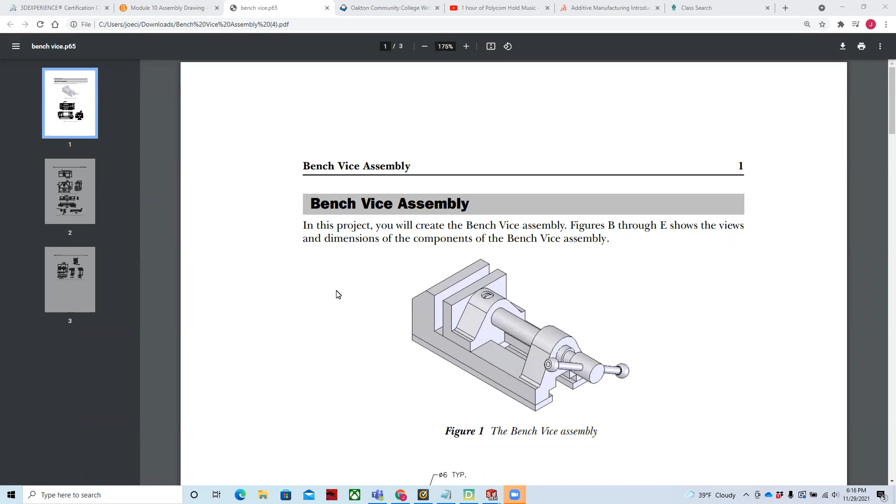As you recall, we're working on this project, and the project is to create an assembly drawing. And let's take a look at the outline. And so we're going to model each of the parts. We're going to create an assembly model of the vise, and then we're going to create an assembly drawing with an exploded view and a bill of material. That's it, 1, 2, 3.

If you would like the files printed, just note it, because it will take a while to print those and use quite a bit of material. And it's yours if you like it. So they make a great desktop companion. So these 3 things: model the parts, create the assembly model, and create the assembly drawing.

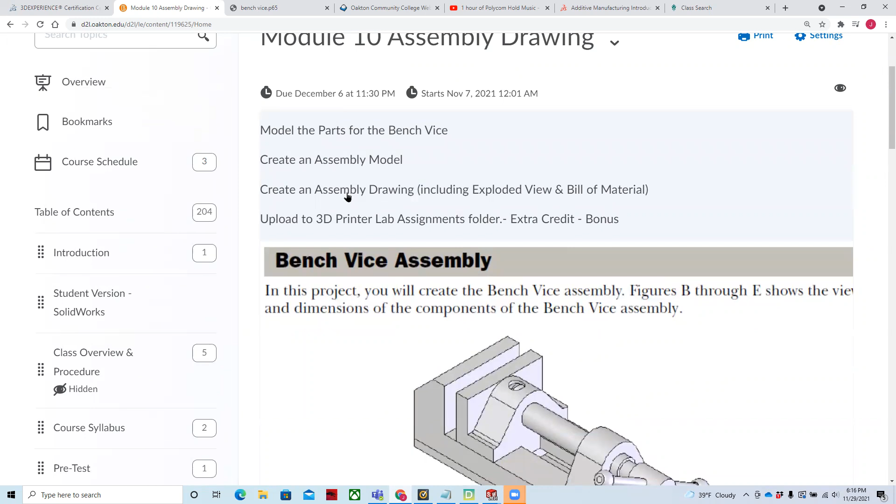So let's take a look at the drawing itself. We've gone over these individual parts and how to model them. And then last week I went through and created a video on how to assemble the parts. And so as we look at Solidworks, let me see if I can bring this onto the screen. This is where we left off our assembly last week. And so we have this assembly that we created from all the different components with our different mates.

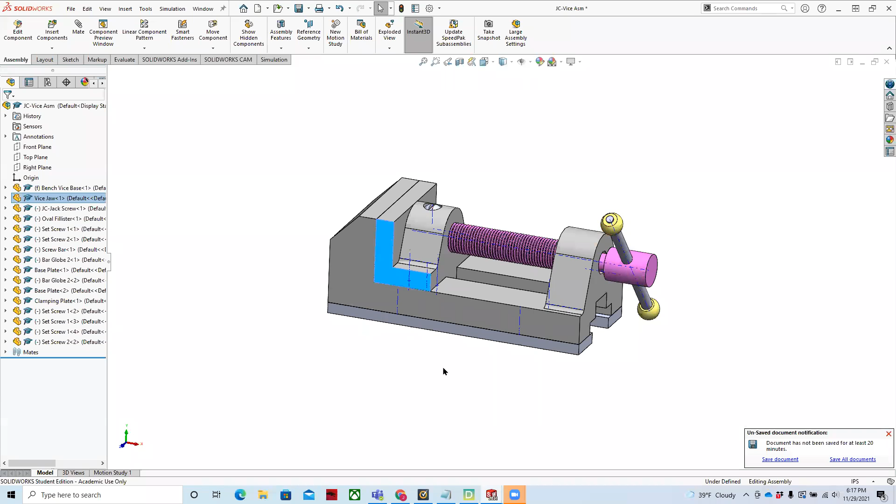And so we can open and close that. And then we have all the mates so that we have our fasteners in, we have our bar globes, we have our fasteners in the bottom, and everything is pretty well set up from a fundamental level. Now, the second part of this would be to create an assembly. And so as we look at this, I'm going to go and grab an assembly view, an isometric view. And that way I have a good frame of reference as to where that part is going to be.

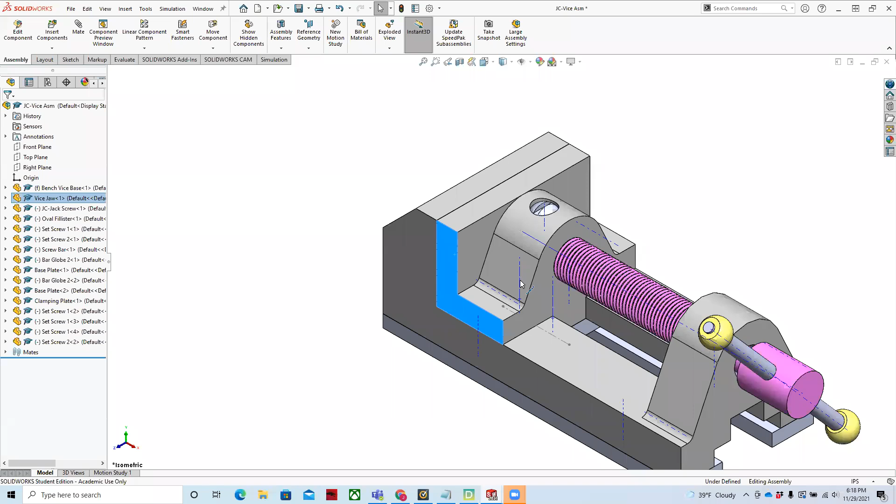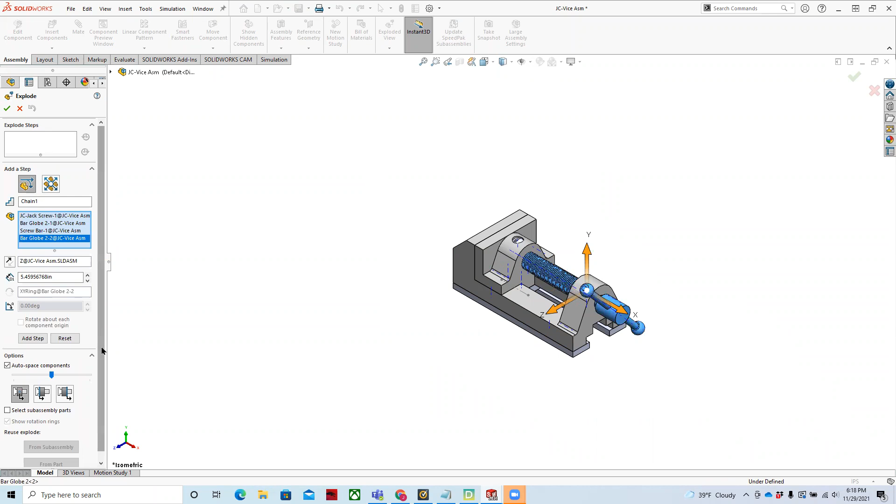And then what I'm going to do is I'm going to go to the exploded view, and I'm going to say exploded view. And what this will do is it will put me into the exploded view detail here. And so I'm going to start off by selecting the components that I want to move. And so I'm going to select the bar globes and this jack screw. And then I'm going to take off the auto space components. I'm not really ready to use that at this point because it'll start to spread everything out. And then all I'm going to do is I'm going to pull on one of these axes and pull these parts out. All right. And so that's the first step.

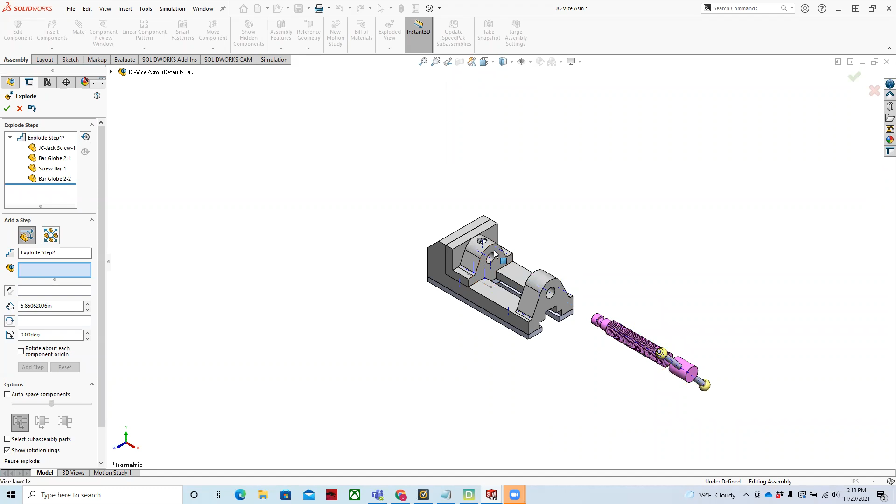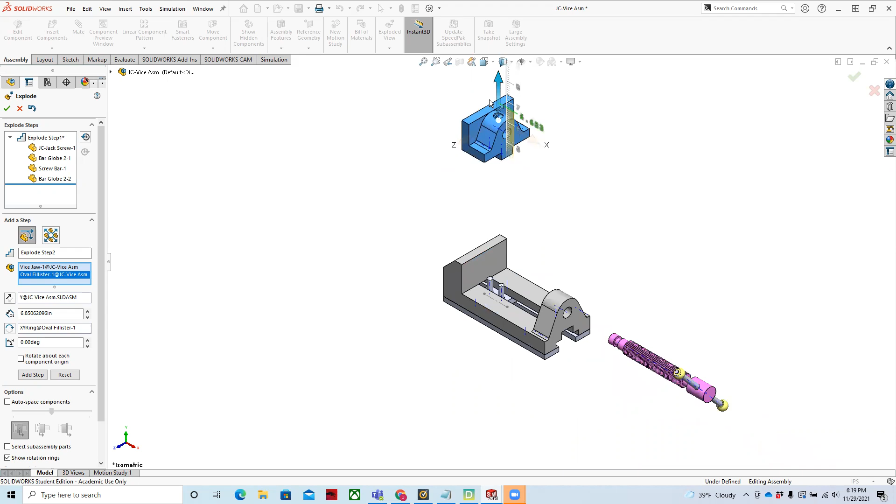And then I can say done. And then I can create a next step. And for my next step, what I can do is I can click on other components. And so I'm going to click on these 2 components. I think I got them both. I'm not sure. There we go. And then I'm going to bring this up. And I'm going to back down a little bit, bring this up a little bit more. Great. And I'm going to say done with that.

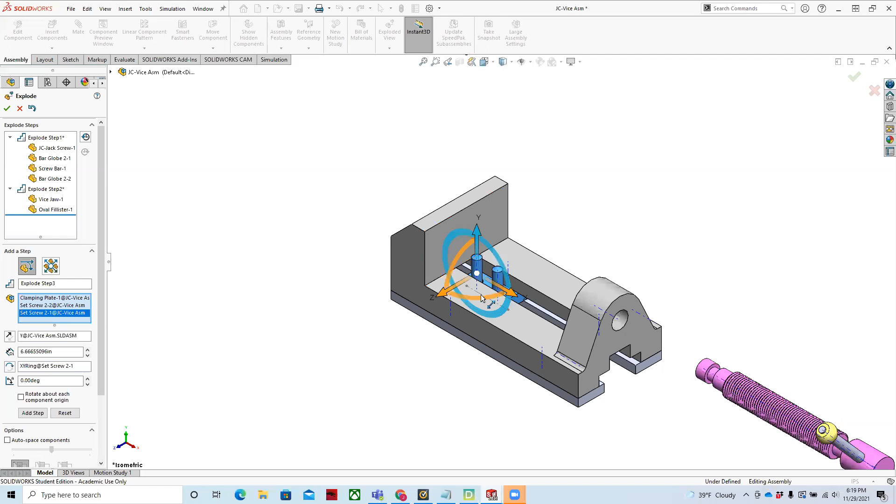And then I'm going to bring the other components. And I was going to bring them down, but I think I will, yeah, let's bring those down. So we'll select these components. We'll bring these down. And then we can separate these other components as we start to work with it. So we can kind of start to follow how it goes together.

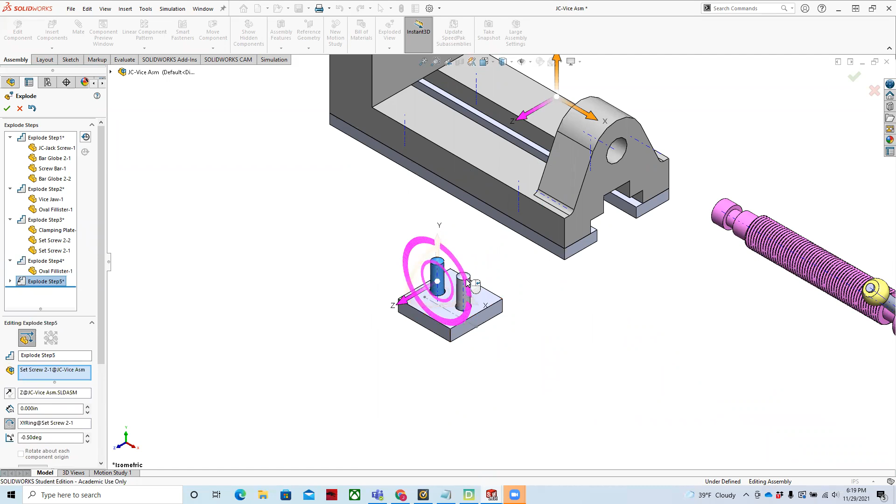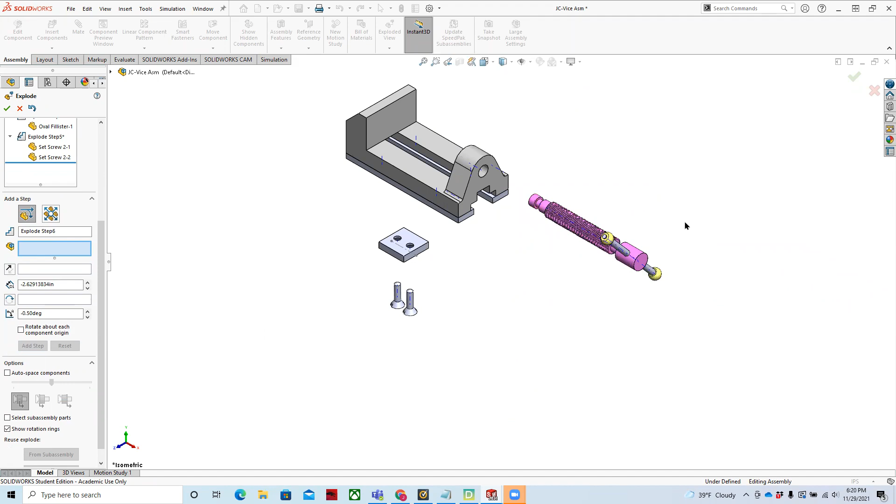I don't know if we need to explode this part here, but we might as well. So let's go with these last components. And let's just move these up. And we'll take these off.

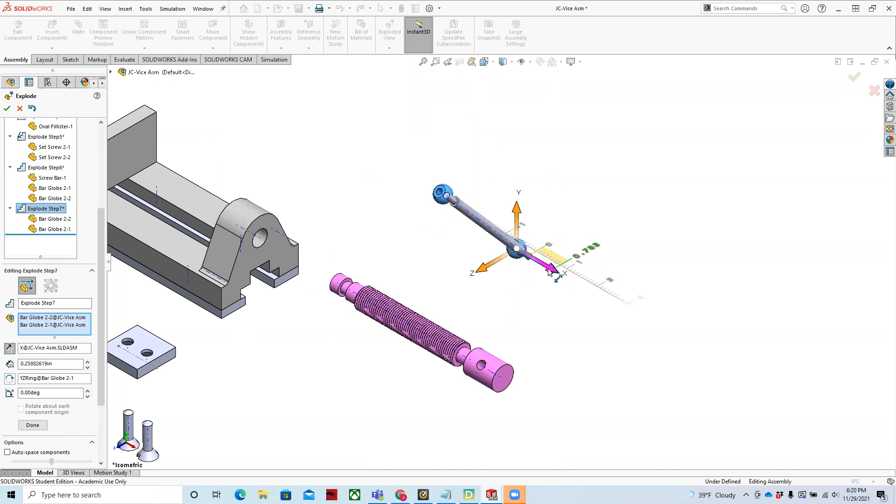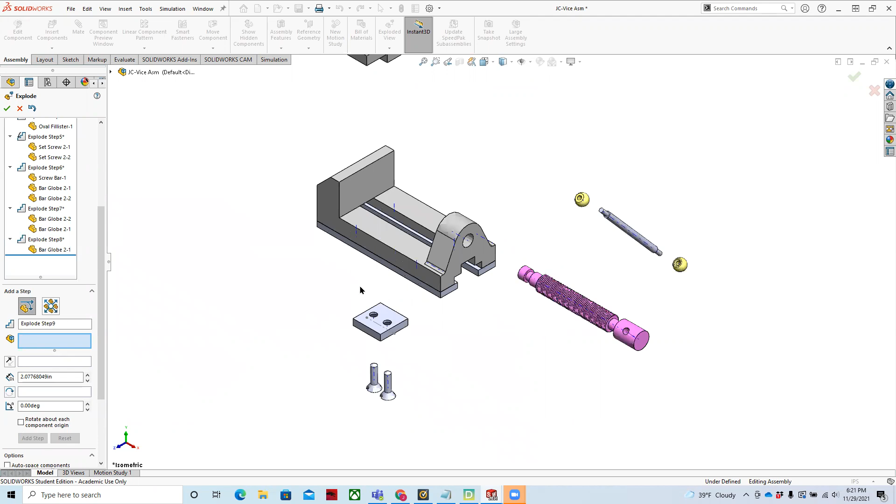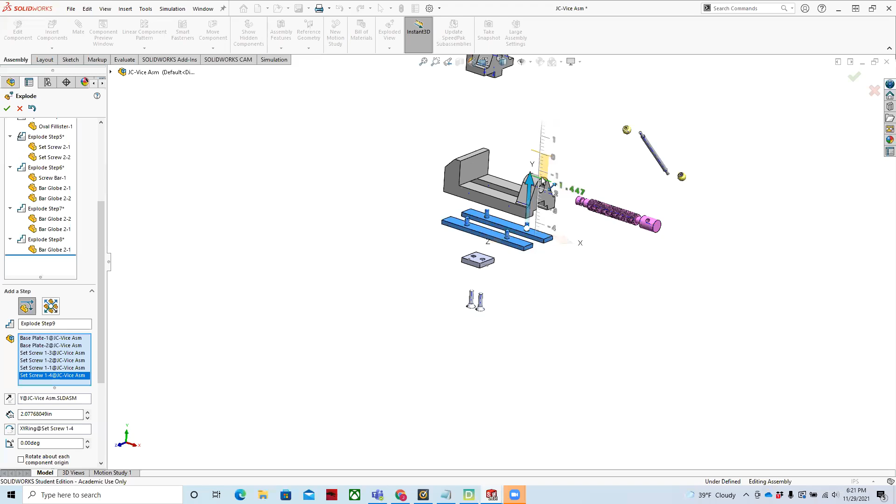That might be a little glitchy on the video, but everything else looks fine. And let's get these last components. Got to remember to get the fasteners with them. And lastly, I guess we'll just have to go about there. Okay.

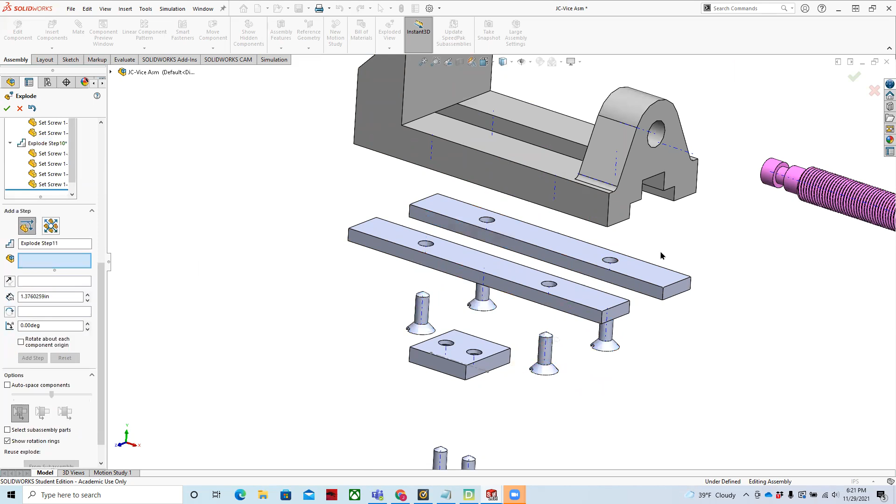So that explodes our components. And then the next thing we'll do is we'll go ahead and accept this. We'll green check mark it. And so this is our exploded assembly. And we can go and we can collapse the items. We can go here to our detail and we can right click on it. And we can, let's see, maybe it's this other one here. So we can go and collapse the items.

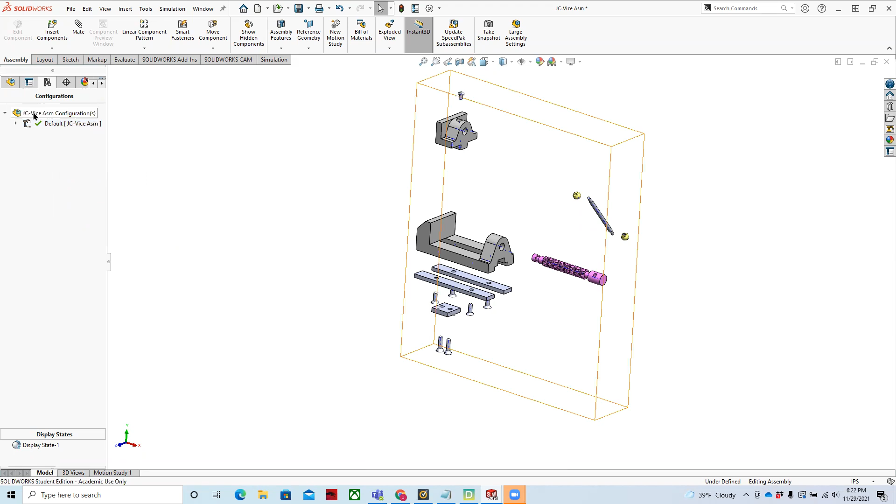Let me pause the video for a second and see what's my glitch. I think I need to collapse the items right here from the main menu. Yeah, that's it. And so we can collapse the items. And then what we want to do, we'll save this file. We'll rebuild the parts. And I'll just keep the name the same.

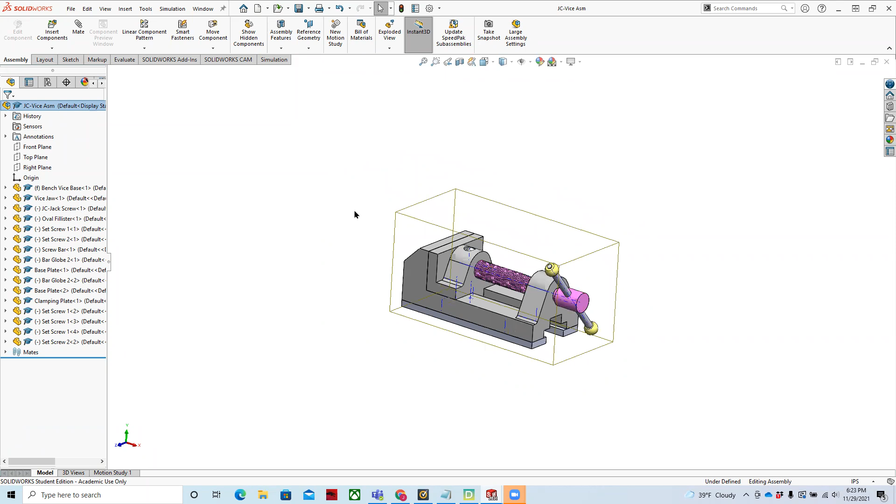And now what we're going to do is we're going to create an exploded assembly drawing. And drawings are really a great part of this program. I wish we had spent more time on the actual detailed drawing component aspect of it. But it's not that difficult either as you start to go through it. And the way we're going to create an exploded assembly is we're going to go make drawing from part or assembly. And so we'll select that. I want you to use a B-size landscape.

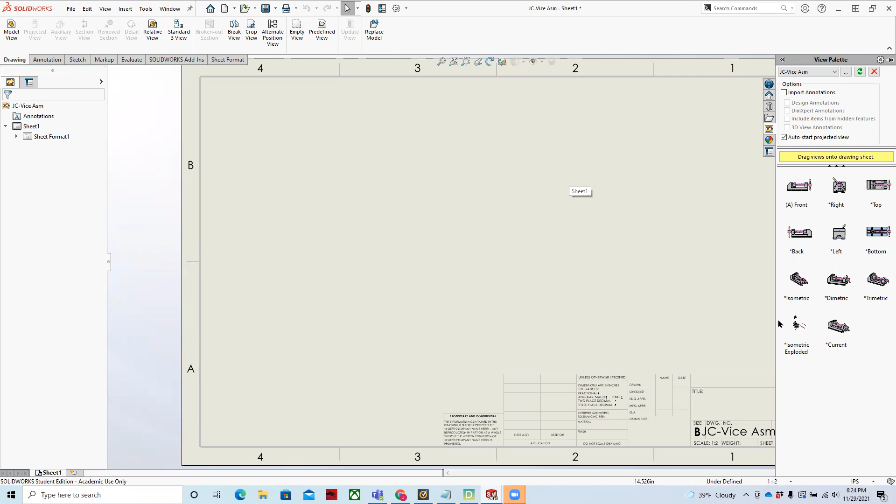And once we have that started, what we're going to do is we're going to bring in our current view. Now, you could bring in front, top, right side views and all that, but I just want to have one view that we bring in. And so we're going to bring in this view right here, like that. And then I'm going to change the scale of it, make it bigger. So let's go with a custom scale and let's see if we can fit it in there on full scale.

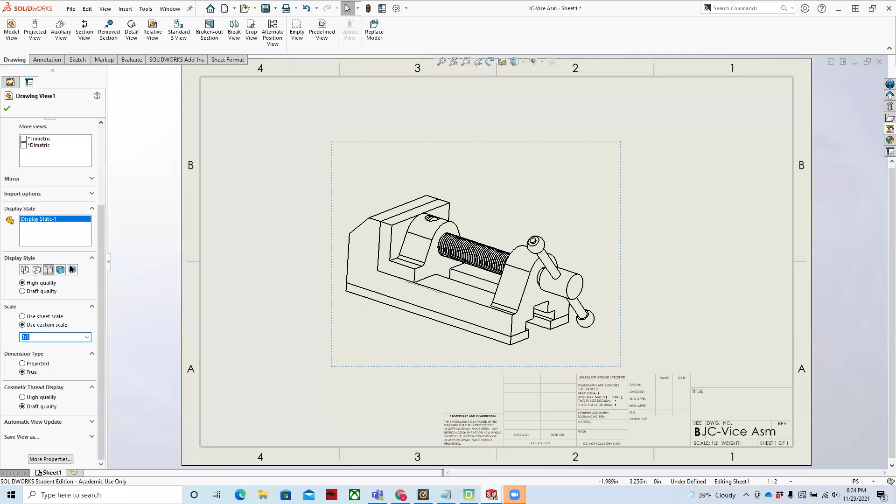And that looks good. And then I'm going to show that in a display state like that. I'm going to green check mark it. And then what I'm going to do is I'm going to show that in exploded view. And so I'm going to go into the properties and I'm going to go and show an exploded view. And I'm going to say, okay.

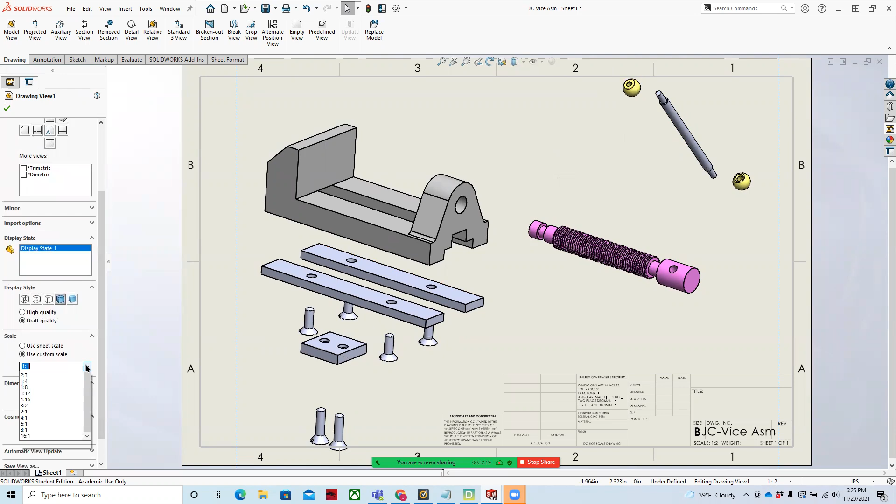And I'm going to have to adjust this window a little bit. Like that. And I'm going to need to adjust the scale. This didn't turn out exactly the way I was hoping it would, but I'm sure I can make that work. And so looks like we'll have to go with a smaller scale. There we are. So here's my exploded view, and this looks fine. And so I'm going to green check mark it.

And then what I'm going to do is I'm going to add the annotations to it. And so what we want to do is we want to go and create a table. And so on the annotation tab, we're going to select tables, and we're going to create a bill of materials table. We'll green check mark this. And what it'll do is it'll go out and find all our details, and then it will number them for us based on how we assembled it.

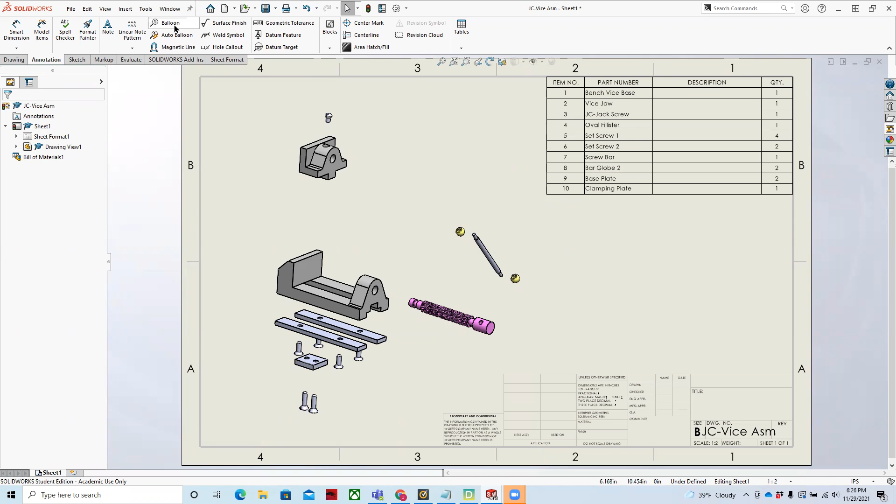And so we're going to put this in the top corner. And then what we're going to do is we're going to add balloons that will then relate to those different items. And so what we'll do is we'll select balloon. And then we can start with our base vice. And then we'll go to the next component. And try to space things out neatly.

What I used to teach with a pencil up at NIU, the idea was to kind of create like a starburst effect where your eye kind of follows the details as they go around it. This is going to be the same. There is a way to have multiple arrows to one number. We can look that up at another point.

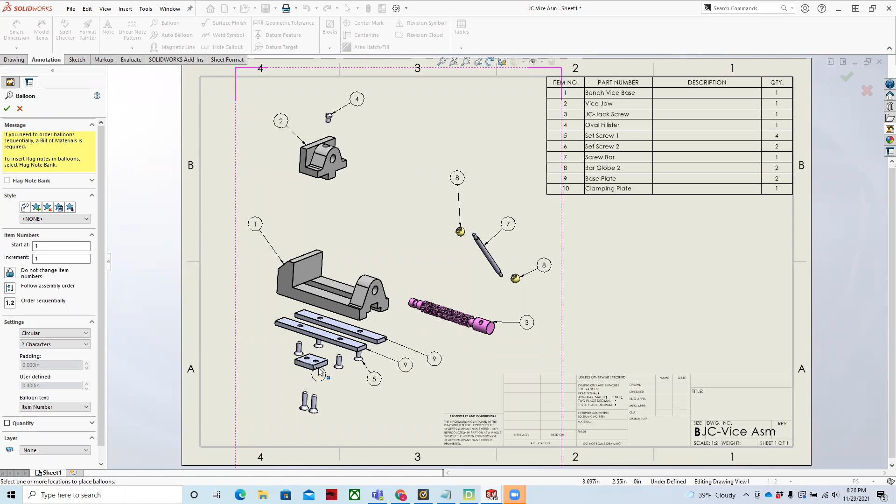All right. And so this illustrates how to create the detailed drawing, the exploded assembly, and the bill of materials. We'll green check mark this. And then we need to be able to put our name onto the drawing.

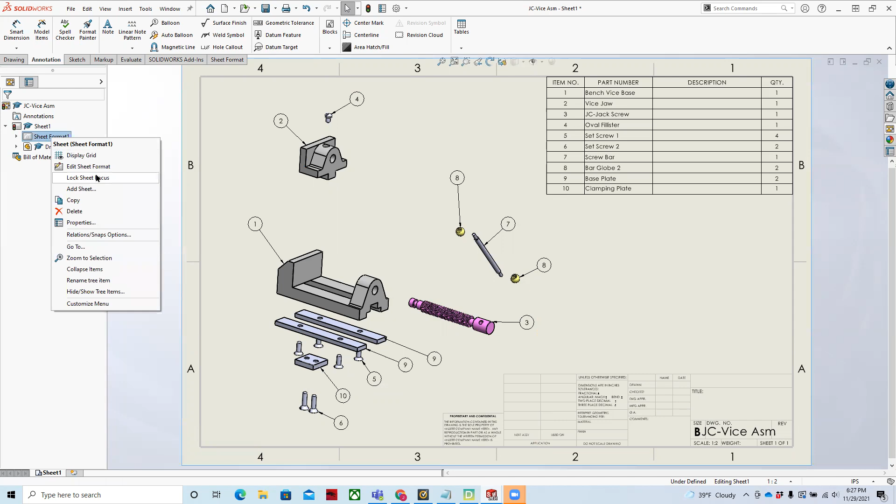And the way that we do that is that they have these called sheet formats. And it's kind of like a layering system, almost like AutoCAD works with, where these parts are linked. So if I do make any changes to any of the fasteners or anything here, they will update in the assembly drawing. But from a standpoint of the title block, the way you would access that would be to right click on sheet format and say edit sheet format. And then what you can do is you can double click in these different areas and you can then add the title block information.

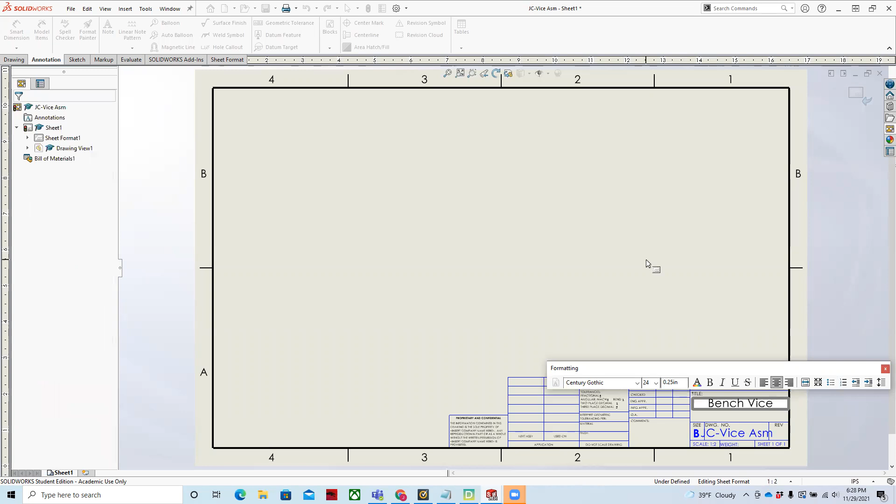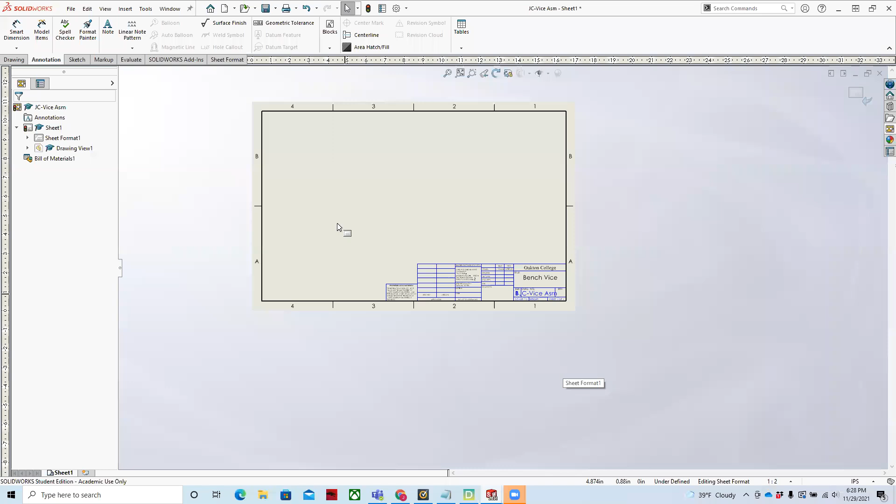So I can put Oakton College there. The title will be bench vise. And then as we go through, I want it to be drawn by me. And that's adequate. We can hit the check mark here to end the editing of the title block.

We can save this drawing. And we'll save this as bench vise assembly drawing. And I don't have to write the word drawing on it. The file extension will have a SolidWorks drawing extension. And so as you go through and you create part models, you create assemblies, and then you create part drawings.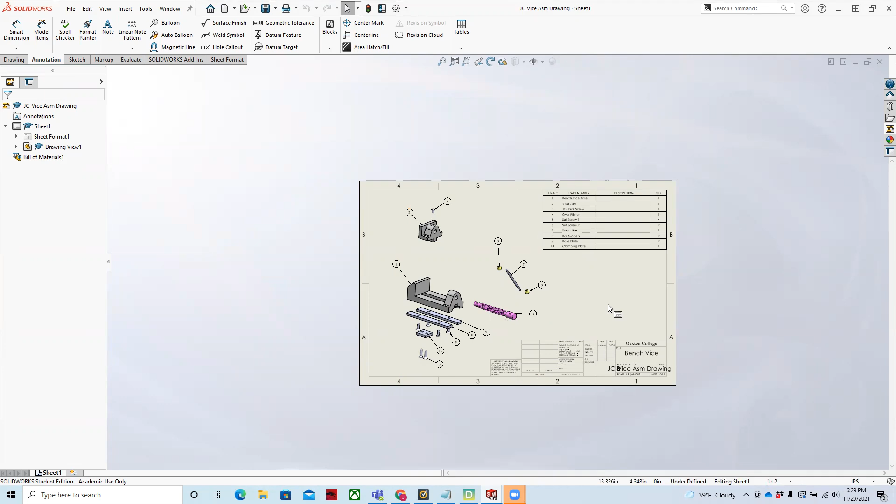All right, and so that is how module 10 is to look at the end of it, basically an assembly drawing. One last thing that I did want to mention is that you want to make sure that in your bench vise assembly, when you turn that in, you're going to use the Pack and Go program. And so let's see here where that is. So it's called Pack and Go, and it's located right here in Pack and Go.

And you'll do this for your drawing. So we'll say Pack and Go. And what you're going to want to do is save the file to a zip file. And then you can browse where you want to put that. Okay. And then you can call it Lab 10. I recommend, I've been doing it with this format since the 90s when I worked for College of Lake County, your initials and then the lab number.

And this will go out, it will put all the parts into the zip file and create a zip folder for those files. So if we look at that, and then we take a look in there. Well, actually, it's right here. It should be. Let's see. Well, I think you get the idea. So as we go through, this will create a zip file of all your components. And then what you'll do is you'll turn in that zip file.

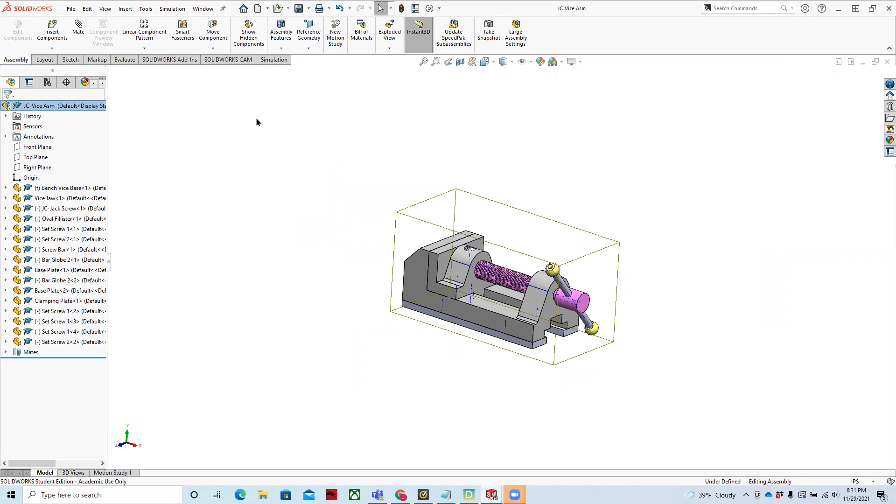If we go to the assembly right here, go to assignments, and then under module 10, and it's a good thing I checked here because I will need to add that.

All right, and so this will be, let's just leave it without any of that other information on it. Now I'll add that as I get a chance to do that. And so what you'll do is you'll turn that into our module 10, make it visible. And I'll link that to the gradebook.

All right, so back to SolidWorks. Back to our assembly. Here's our assembly drawing. And that completes how to create the assembly drawing for module 10.